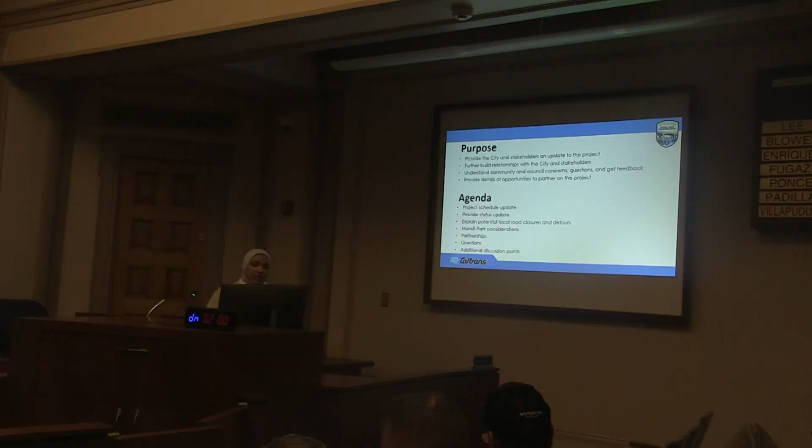So today I'm going to go through the project schedule, give you a status on where the project is at, explain some of the potential road closures. They're going to be not just on the highway itself, but certainly some local impacts as well as detours. Some considerations for Morelli Park, which the city oftentimes leases from the state. And look at opportunities for partnerships, and in the end see if there's any questions the community may have.

So again, I will be presenting. I'm the project manager. With me is Jared Craigmore, who's the project engineer, as well as Greg Hewitt, who's the pre-construction manager. We do have a contractor that is assisting us through the design process. They have not been awarded the construction contract yet.

All right, a little bit about the project purpose and need. This bridge, or this set of bridges, was built back in the 1970s, and it spans the Stockton Channel. We're hoping that the replacement of these bridges will ensure long-term serviceability and upgrade the bridges to accommodate permitted loading. Right now it accommodates a certain level of permitted loads. We're hoping when we bring it up and improve the standards, it can carry higher permitted loads.

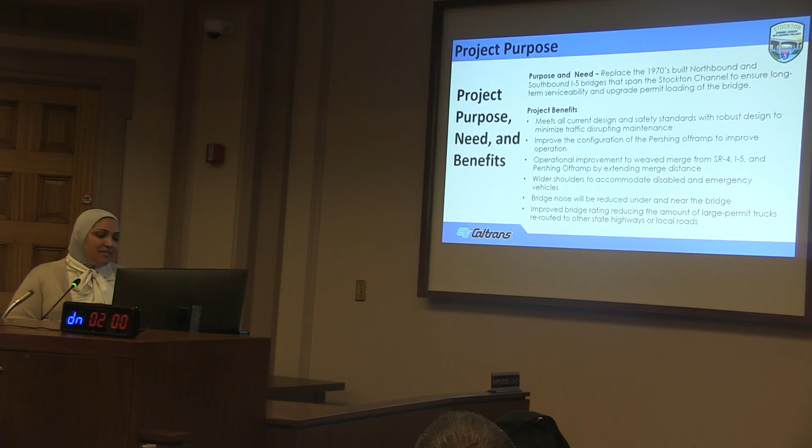The project benefits include meeting all current design standards. It was built to 1970s standards, so that's one of the things we'd like to update, along with current safety standards, while hoping to minimize traffic disruptions and maintenance. We're also hoping to improve the configuration of the Pershing ramp to improve its operation, and improve the operational weaving that happens between State Route 4 and I-5.

This is going to happen by extending the merge distance along the on and off ramps. We're also going to put in wider shoulders. Right now the shoulders are a little narrow, and oftentimes we have to shut down the lane just to perform inspections, not just maintenance. There's likely going to be a reduction in noise because of the type of bridge we're going to be constructing. Lastly, we're going to improve the bridge rating by reducing the amount of large permitted loads that sometimes have to reroute to other state highways or even local roads.

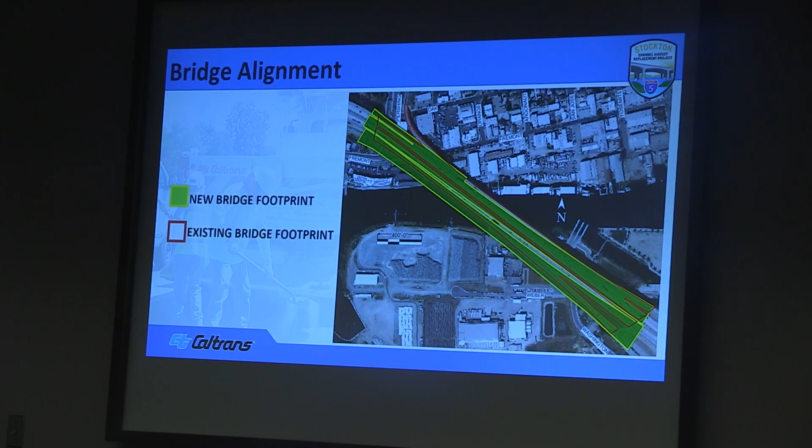So what you see before you is the existing bridge footprint right now. We're going to be shifting the bridge about 50 feet in a south-westerly direction. So the green outline is basically where the bridge is going to be shifting.

The current schedule of the project: we are in the pre-construction portion, meaning we're in design, and we're in the acquisition of environmental permits process right now, as well as securing some of the right-of-way needed for this project. We're going to be working on the design for the next year and a half, and the northbound will be complete probably in the second half of 2028.

We also did get the biological opinion for this project already, and we are going to be looking to get our CEQA and NEPA addendum completed by next month. The environmental permits process applications are starting, and hopefully we are going to be receiving all of them by next fall. The right-of-way acquisition has actually already started several months ago.

The construction schedule - we're going to start with a pre-construction task: a geotechnical investigation we have to perform. It's a test pile program, and we're going to try to see if we can reduce the length of some of these test piles. I'll talk more about that. Then after that, we're going to start with the Buena Vista overpass.

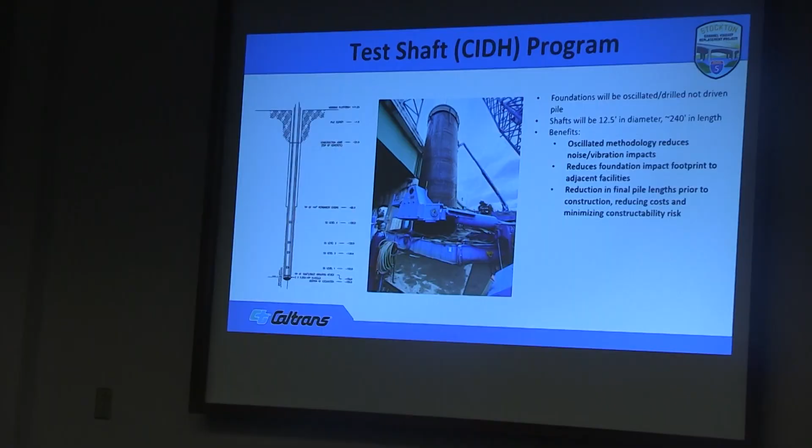This is the test shaft program we talked about. This is really something we have to do to help optimize our design. The piles right now, the shafts, are about 240 feet long per the current design. We're hoping to make them a little bit shorter and hopefully save some money.

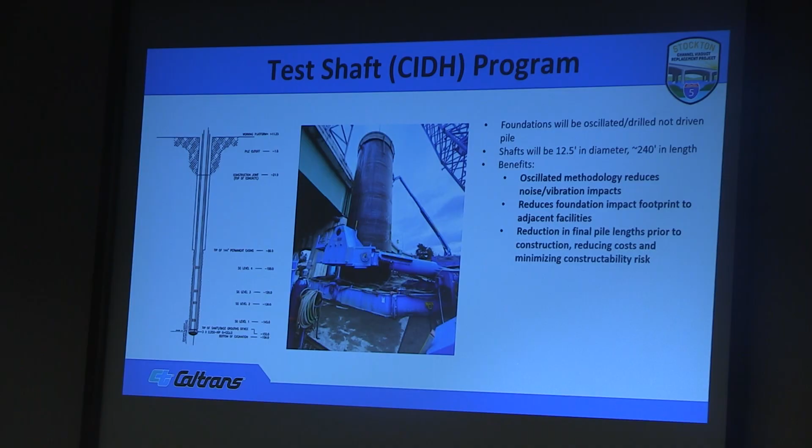So we're going to be doing some tests in a couple of locations. This is going to utilize an oscillation method - a very big hole, about 12.5 feet in diameter. We're going to oscillate this, so it's not going to be pounding, if you will, but very much an oscillation method of construction.

As noted, when we reduce the length of the piles, we reduce cost and we reduce a lot of risk. If there are any constructability issues, we capture them early before we're actually full on in construction.

There's going to be multiple locations for this. The test pile program is probably about 4 months in duration. We'll probably have about 3 locations for this, and I'm hoping I can point them out to you. So this is one of the locations over here in Morelli Park, and this is another one of the locations over here in Morelli Park. We'll likely be occupying a portion of Morelli Park while performing this particular test.

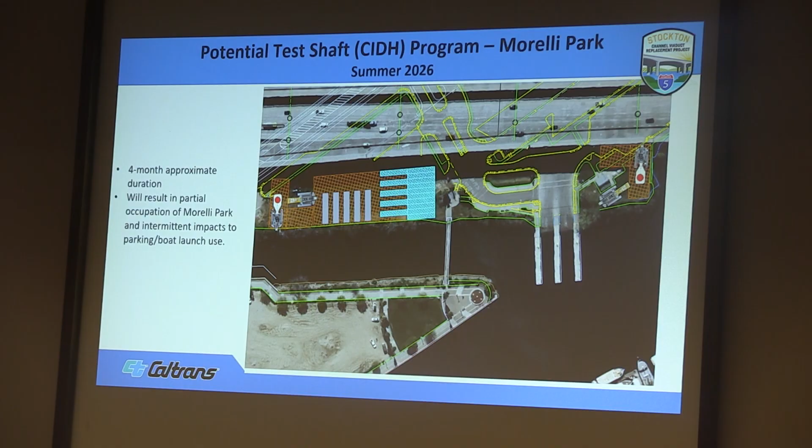Likely, we're targeting the summer of 2026 to be performing this. So some of the parking might be limited, and the boat launch might also be limited during that period. The other location is over here.

If you recognize this particular area, this is the Pershing off-ramp right now, and this is the on-ramp over here to I-5. This is sort of the little corner area between this highway and the ramp, where we're looking to perform that other test pile. So there's going to be a total of 3 locations, and all of those will fall within Caltrans right of way.

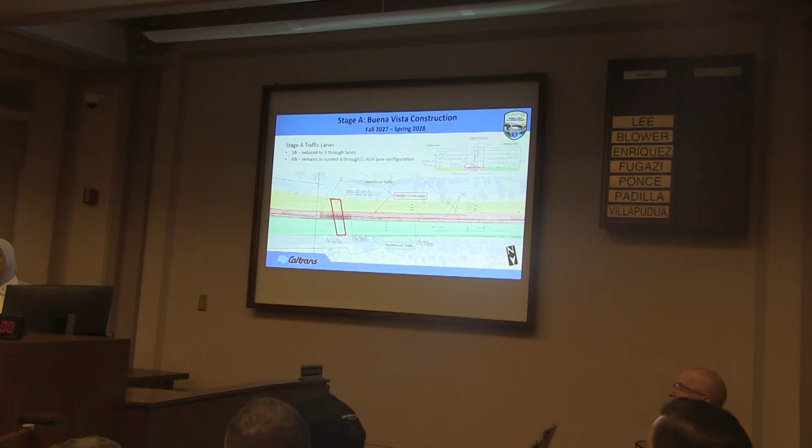Okay, Buena Vista - this is stage A. It's not quite stage 1, but it's stage A, and this is intended to help with the shifting of the lanes.

We're going to be widening this particular section over here, and we're going to have basically 3 through lanes on the southbound bridge, while the northbound remains as is in this particular scenario.

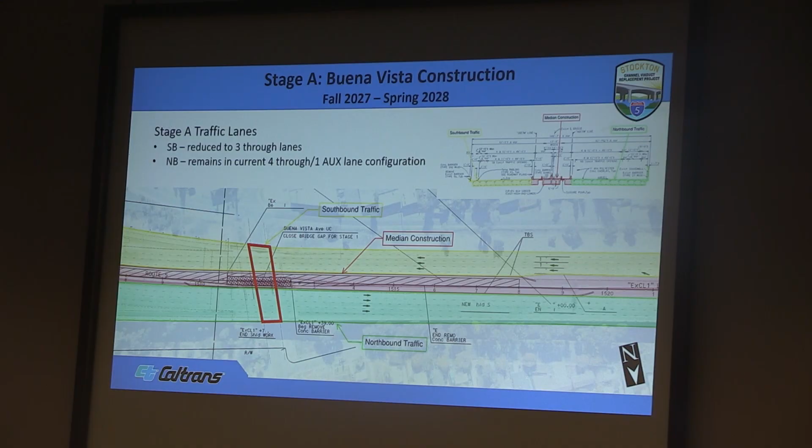This is intended to be late fall of 2027 into spring of 2028. So this is not intended to be a long segment.

After that, we're going to move to stage 1. This is the outer side of the southbound bridge, where we'll be demolishing the outside portion of the bridge, and there will only be 3 through lanes on the bridge. The northbound bridge will not be impacted.

And you'll see over here, this is the new bridge construction - I'm just going to call it the tan color. The tan color is where the new bridge construction is going to be. Stage 2: we shift the traffic onto the newly constructed portion, what was tan now gets to be yellow.

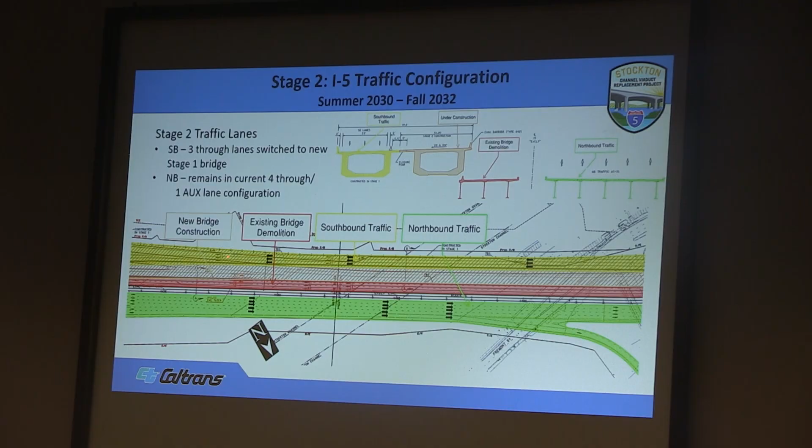So the southbound traffic will be on this portion. Then we will come in and demolish the inside portion of the bridge, the red portion over here, and construct the tan color. So this is stage 2 for the southbound bridge. Again, northbound will not be impacted - it will continue as is.

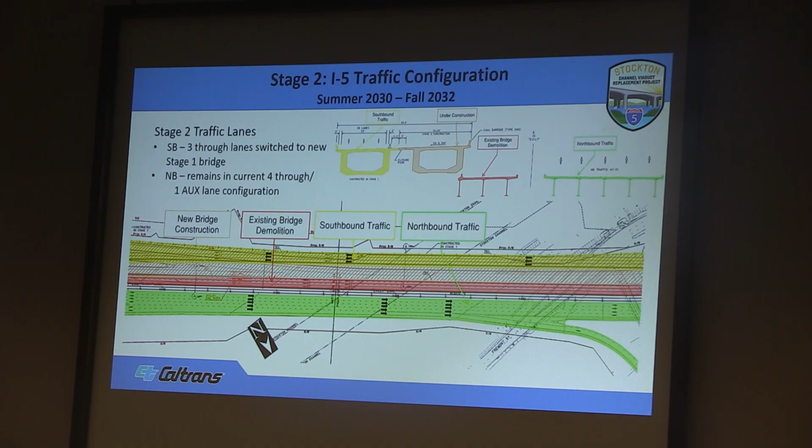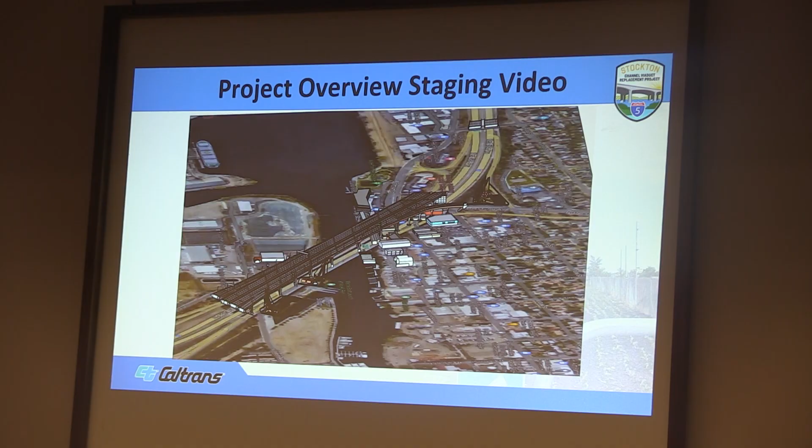This is a short video to describe what I just said. We're hoping visually it might help everybody understand how this is going to work. I hope this is going to start with the test pile program first and show you the locations of those.

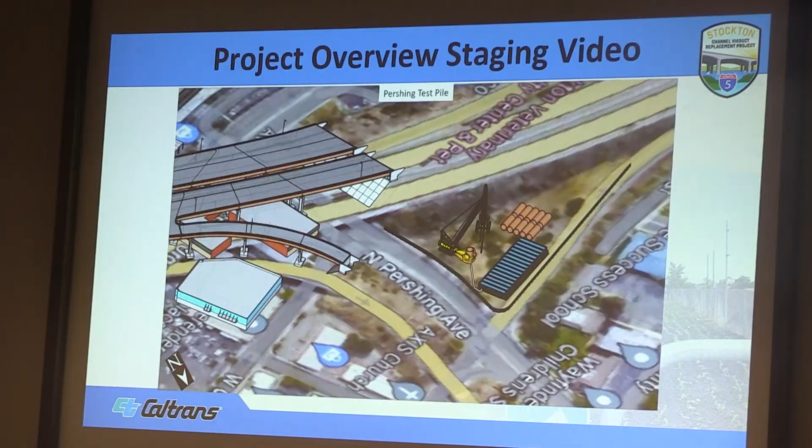All right, so those are the areas in Morelli Park over here, and you see where the boat launches are. And then over here, this is the area off of Pershing and near the on-ramp.

All right, this is the Buena Vista segment over here that we're going to call it stage A, if you will. This is the widening of Buena Vista.

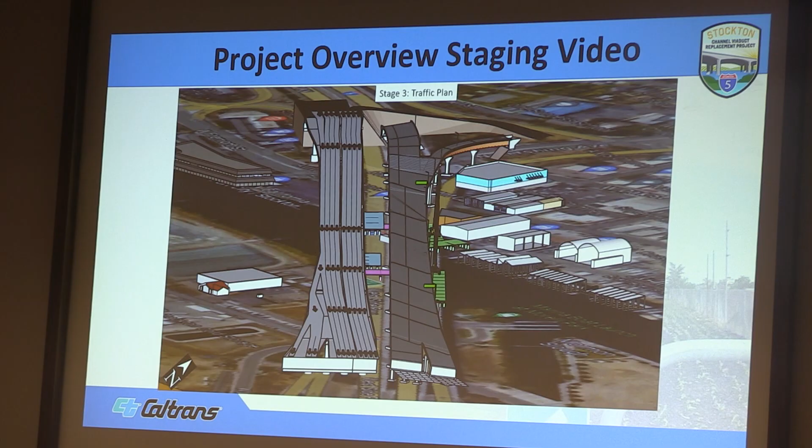And then over onto the southbound bridge, you will see stage 1. We take out, we demolish the southbound half bridge and reconstruct it. Stage 2, we move the traffic onto it and take out the inside portion of the bridge and reconstruct that. And then switch the traffic both onto the same bridge and reconstruct the northbound bridge.

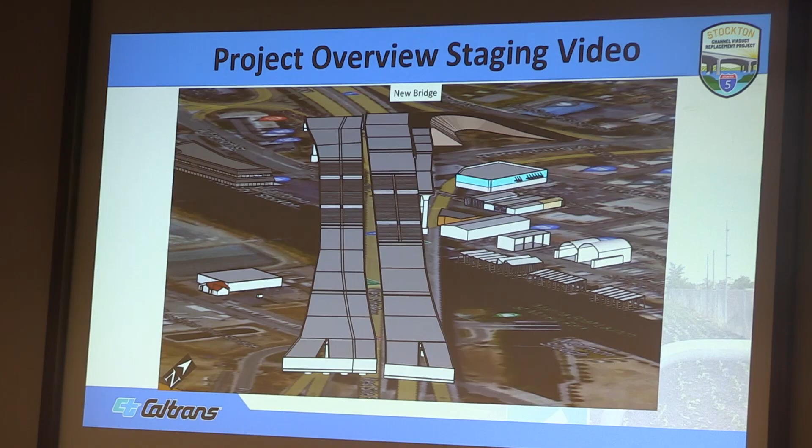And what you will see at the very end there is a hook ramp showing what the Pershing reconfiguration will look like at the end.

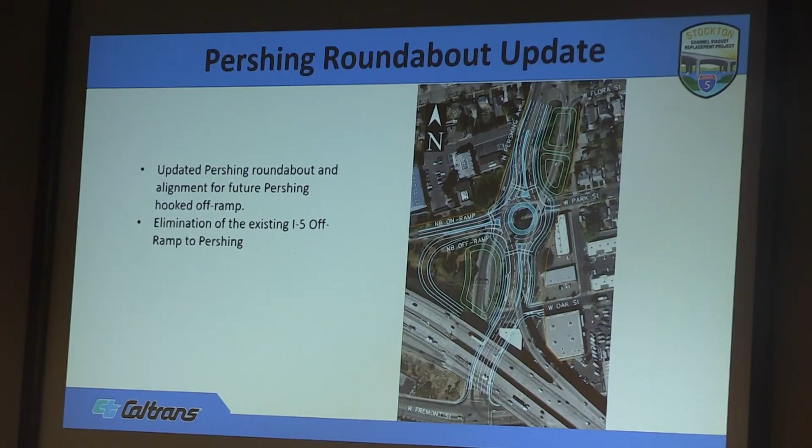One more item: the termini of the Pershing off-ramp, after some study, we concluded that a roundabout is the best way to actually treat that termini. It's the best thing in terms of safety and in terms of operation of that particular area. It slows people down significantly, and so that local operation continues.

Do you mind taking a question right now? I'm sure. Sorry, quick question. So in terms of timeline, this Pershing roundabout, where are we with that in terms of years?

So this is the very last piece that is going to be constructed. We have to start with shifting the southbound bridge first out of the way, and then constructing the northbound bridge. When we shift the northbound bridge, we'll create enough space for the hook ramp that will come off of Pershing, and the termini will be the roundabout. It is the very last piece of the project.

And I asked that question because I guess I asked this earlier to the chair: why wouldn't north and south be inverted? I mean, I would think that the northbound is more of a priority. Why can't we? For the record, why not?

We have to create the space in order to create the hook ramp, in order to add the roundabout. Right now, this space does not exist. It is really, really tight between the on-ramp, so we have to shift it a little bit, put the hook ramp in, and put the roundabout. But we have to shift both bridges first. That is the staging that we actually determined. There is no way to start with the northbound bridge, unfortunately.

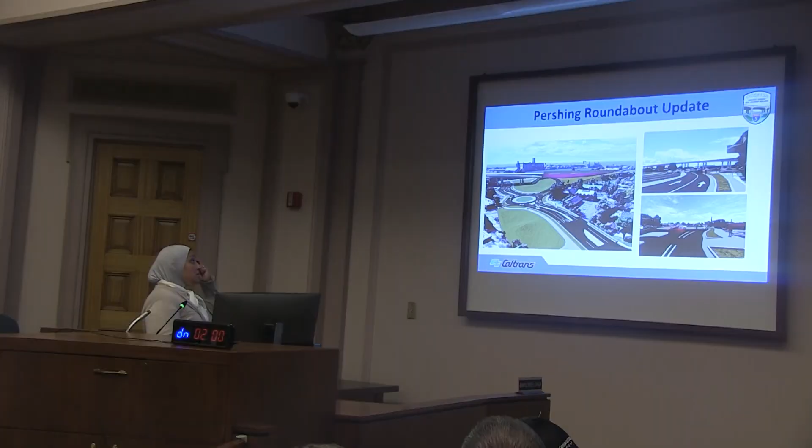Okay, so a little bit more about what the Pershing roundabout sort of things look like. This is a little bit of a simulation, if you will. It's not exact, but it's the best that we can do at the time. Basically showing the traffic moving east and west through the roundabout, and certainly being able to traverse.

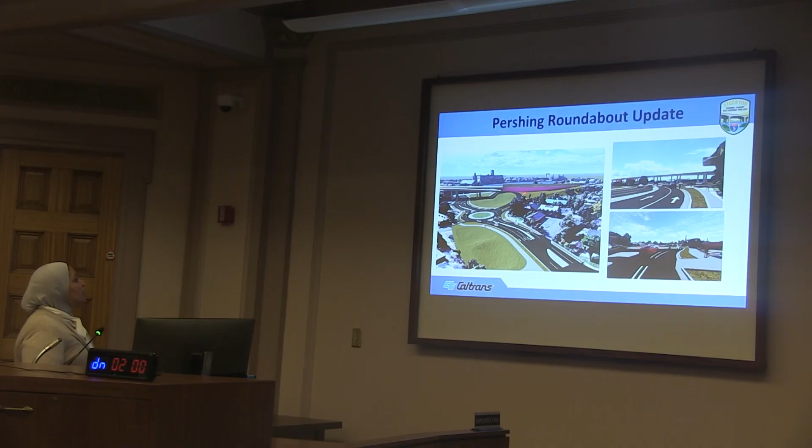So, I don't know if it helps. Over here, you can sort of see the northbound and the planned southbound hook are really close to each other. We're going to be eliminating the current off-ramp that exists right now. That's one of the things we're planning on doing. But we have to create, by shifting the northbound bridge a little bit more southwest, more space here so that the ramp and the super elevation of the ramp is appropriate. Otherwise it becomes way too steep, and cars end up with a little bit more centrifugal force coming in. So we're trying to create a smooth transition.

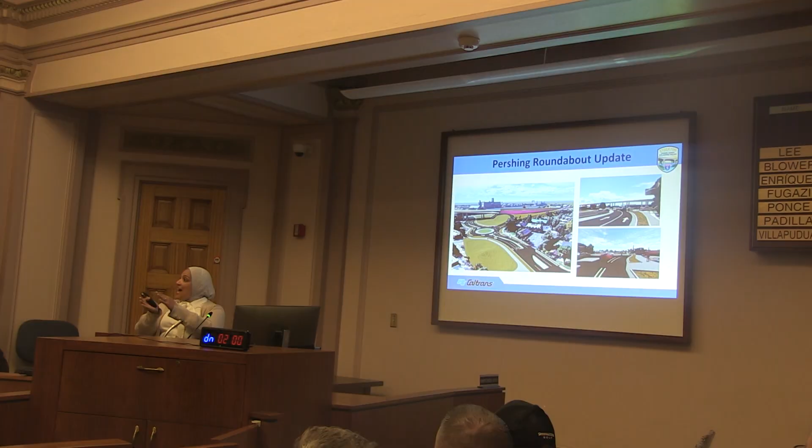And all this isn't going to be done until, what, fall of '35? Yeah, it will be the last portion of the project. Any chance we can do it a little quicker? You know, we are constantly looking at our schedule and trying to find efficiencies in it. Whenever we're able to put two tasks together instead of making them in series, making some of them parallel so we can create efficiency in the schedule, we are. So we're looking at some efficiencies already.

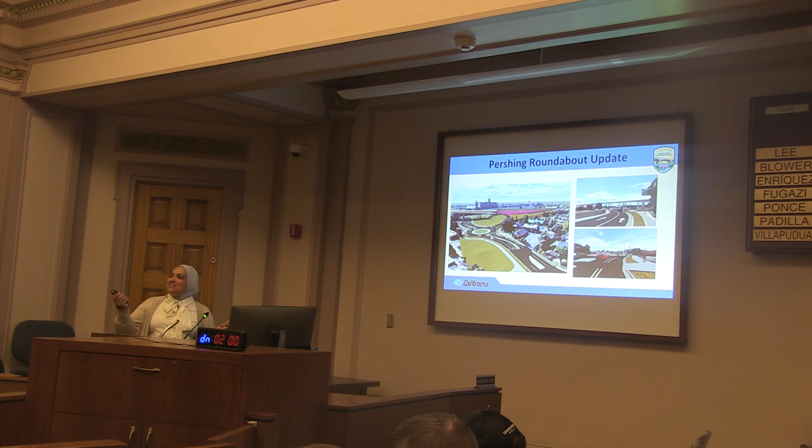Okay, I'm going to hand it over to Greg to talk a little bit about local road improvements. Very much.

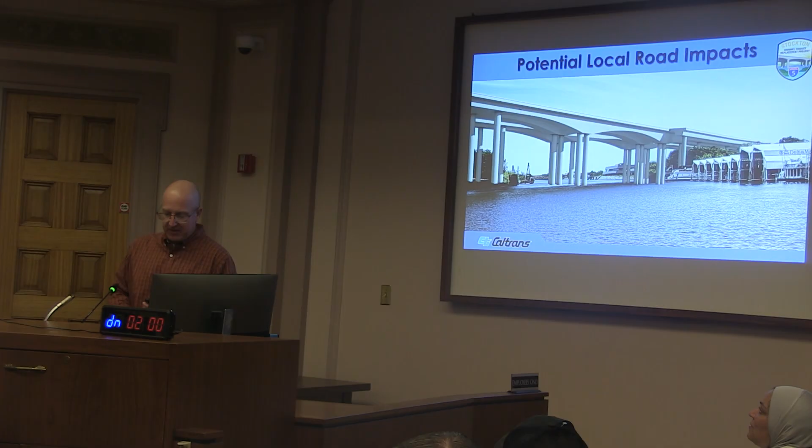Hey, good afternoon, gentlemen, thanks for having us. My name is Greg Nix. I'm with Kiewit Construction. We are the pre-construction contractor working with Caltrans right now through the process. I'm going to talk to you a little bit about what it will look like as we're doing construction. You'll have to envision some things because obviously we're not building anything right now. Dina talked about various strategic staging of the work we're going to be doing, and Jerry's going to talk to you about some of the impacts of our work on the local community. So I'm going to try to explain how the work happens.

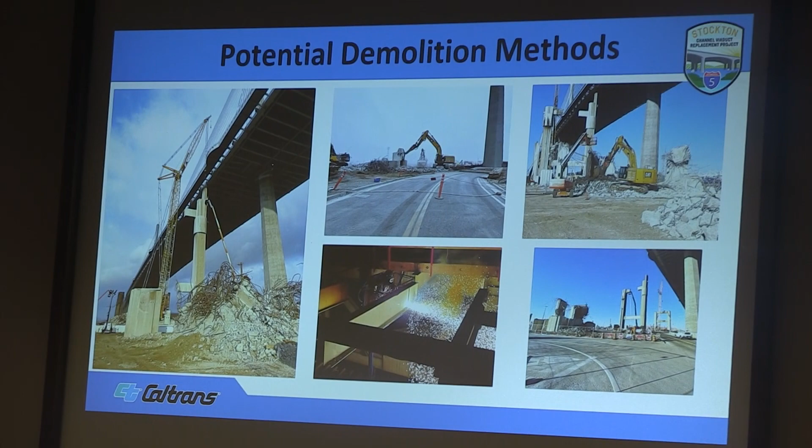The first thing we have to do with every stage is demolish the existing bridge, and this is what it looks like. Here's some pictures of demolition from other projects we've done. It's messy, it's all overhead work, everything's happening up above you. So it's not safe, it doesn't make sense for traffic to be moving underneath. There's always going to be some sort of impact when we're doing demolition of overhead work, and so at those points in time we're going to take traffic and detour away from the work.

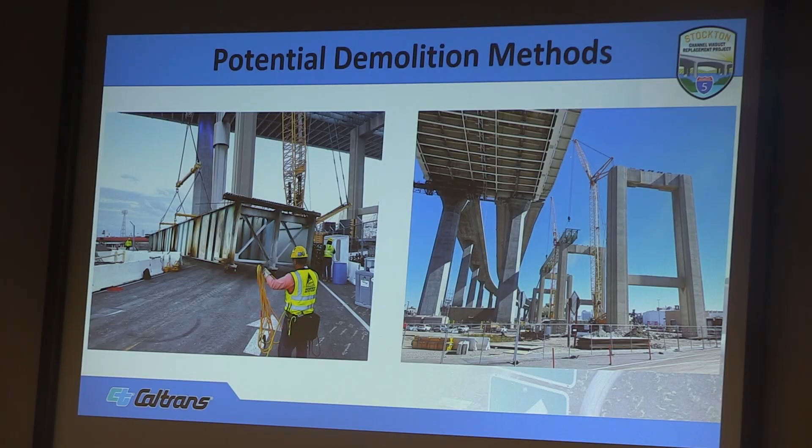The first part, those first pictures, was some concrete demolition. This is structural steel demolition. The way we'd approach the work is we're going to pick these pieces of the bridge down in the biggest pieces possible, set them down to the ground, cut them up into smaller pieces, and get rid of it. So what do you do with these big pieces? You pick them off the bridge and set them down on the ground, which sometimes is going to be right on the road we're working on. That's why we're going to impact some of this work.

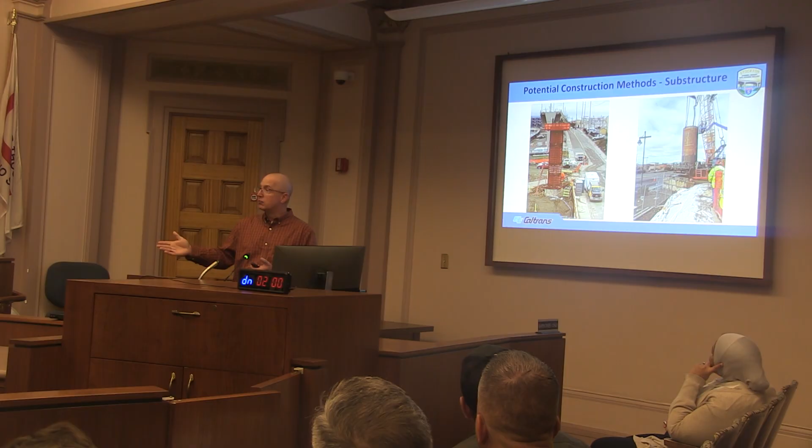After you demolish the bridge, the next thing you do is start construction of the new bridge. The first part of construction is the foundations. Dina talked to you about the foundations on these jobs being 12.5-foot diameter, 240-foot deep drill shafts. Everything is big, the equipment is big that goes along with it, and it takes up a lot of space. Some of the foundations are right near existing roads, some are at medians of the roads, so we need space to do that work. Again, when some of this work is going on, we'll have to detour traffic around it to keep traffic and pedestrians safe and away from our work.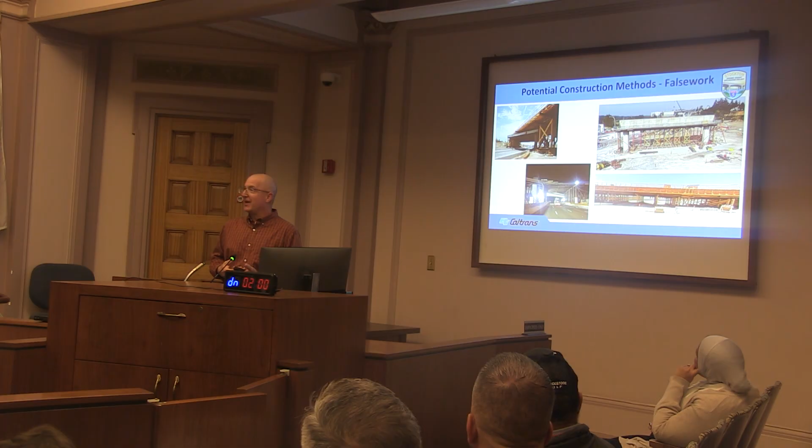Once we build the foundations and the substructure, now everything up above you has to be built. The entire bridge is all constructed of cast-in-place concrete, meaning we bring concrete in on trucks, pump it into place, it has to cure, we stress it with post-tensioning, and then it's done. But we have to support that concrete somehow, so we support it with false work. False work, again, takes up a lot of space. These are some pictures of several other jobs where we've built false work to support the concrete up above us.

In some cases, like the picture in the top left, we can build a tunnel for local roads to go through underneath our work. And in some cases it just doesn't work or doesn't make sense, so we'll build falsework across the roads and detour traffic around it temporarily.

Dina talked about the staging. The job will be built in 3 stages, meaning we're going to demo and build a bridge, demo and build a bridge, and demo and build a bridge. So the process happens 3 times, and there's always going to be some sort of impact.

Jerry's going to talk to you about sometimes when we have prolonged closures and sometimes when we have intermittent closures with detours. But that's why the process is going to be that way - it's not just going to be, hey, we're going to come in and hit the demo real hard and then go away. We're going to hit the demo hard and we've got to build a bridge, then we've got to do it again 2 more times.

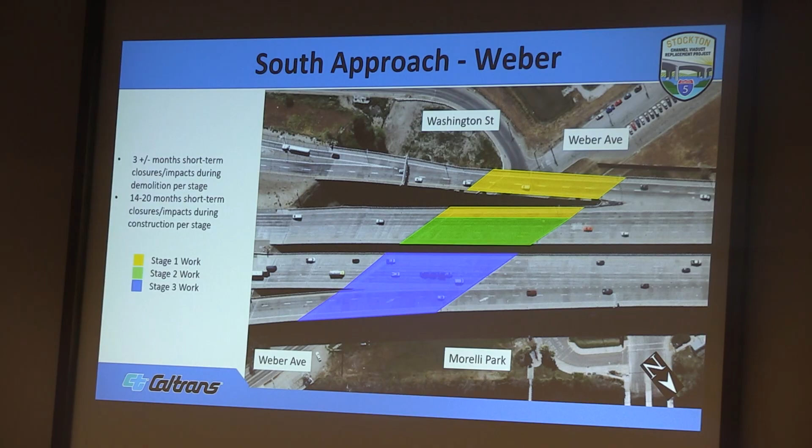This is Weber. Same thing on Pershing and Fremont. When we're on Pershing and Fremont, you've got 2 roads right there being impacted similarly. We're going to try our hardest, and we've got some detour plans where we don't impact both Fremont and Pershing at the same time. Hopefully we'll be able to work it out where we impact one and detour traffic around, then impact the other, and vice versa.

Jerry, I think the next few slides are yours. Jerry's going to talk about, now that you understand exactly what we're going to be doing and how we stage the traffic, what happens with the traffic. So I'll turn it over to Jerry.

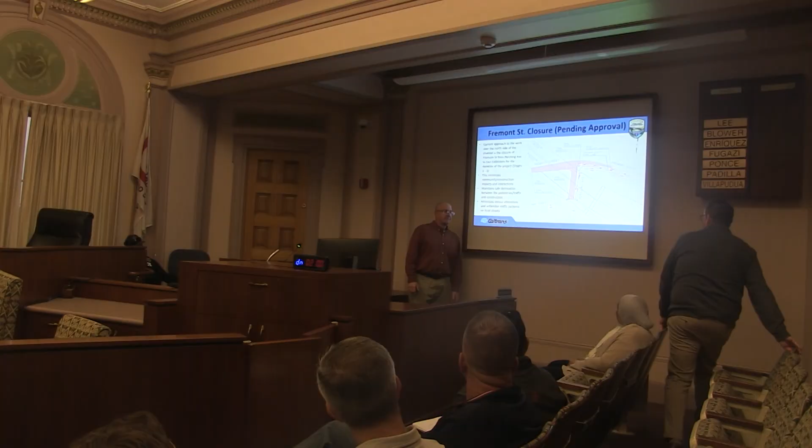Hello everybody, my name is Jerry Brigmore and I am the project engineer for the roadway portion of this project. It's predominantly a structure project, so the structures design team is going to do most of the work, but the roadway part is what the team I work with is working on. So let me make sure I know how to work this thing.

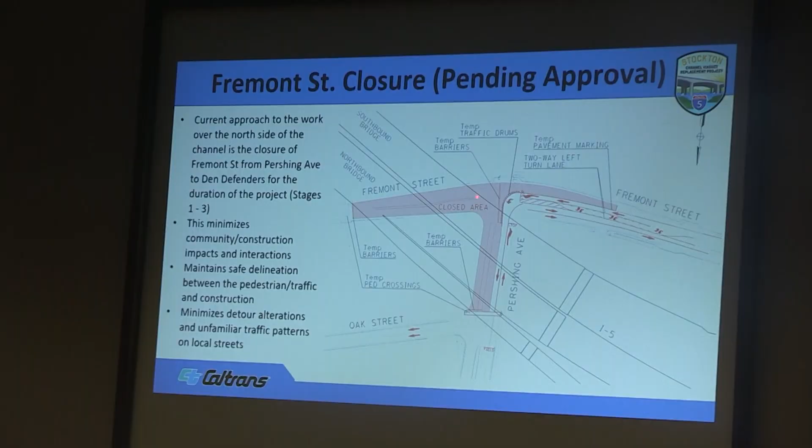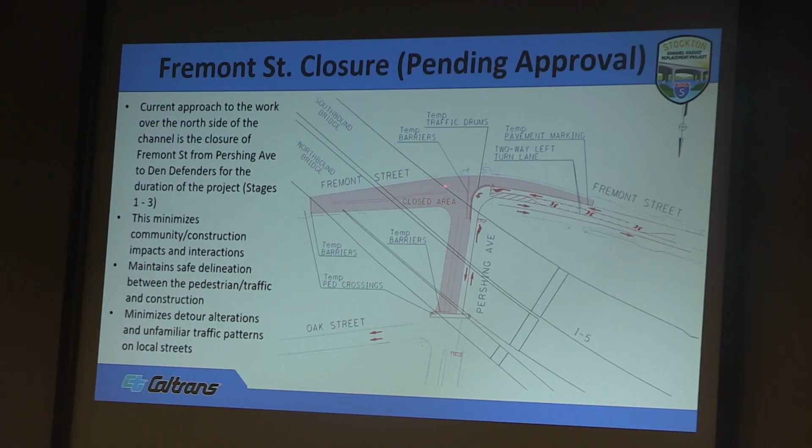Greg talked about and showed pictures of falsework. There's basically a forest of falsework piers and structure that's going to be on Fremont Street, Pershing also. There's going to be constant construction vehicles and equipment going back and forth across Fremont Street.

While it would be possible to snake traffic through there when we aren't doing something really dangerous overhead, there will be some times when there's not really dangerous things going on overhead. But even then, to be able to allow traffic through there would really add a lot to the project schedule.

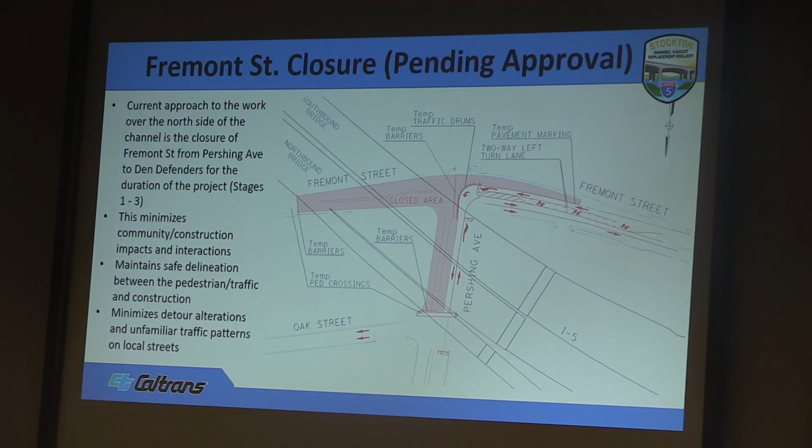So for Fremont Street, the design team really felt like it made the most sense - instead of having Fremont Street open to one lane of traffic and then closed for a while, then open for a while, then closed for a while, with people trying to figure out when is it open, when is it closed - it just made more sense all the way around to have it closed for the duration of the project and get around it on Orange Street, Oak Street, and Park Street to Pershing Avenue.

You can see we'd have the east half of Pershing Avenue closed, and then the west half - north, if you see in the upper right corner, north is pointing down on this map, and that has to do with the way Caltrans orients its plans. It's confusing, but the west side of Pershing Avenue on the right would be open most of the time, but also would have to be intermittently closed because we're also doing some of that dangerous work over Pershing Avenue.

But we have planned to not only keep it open, but also to guarantee access to and from the Golden Bear property on the south, the Arco AMPM, and I believe the veterinary clinic on the north side.

That was kind of an important thing for us, but also to protect the workers that are going to be working in those areas. So, okay, I think next slide.

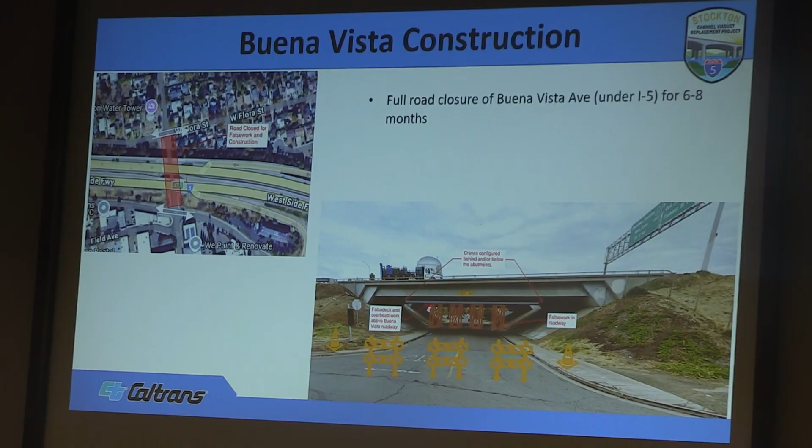Greg already mentioned the Buena Vista work, which is so we can close the gap between those two bridges so that traffic shifting can happen when we shift traffic, it needs to go where there's a gap right now. So first order of work is to close that. This is about what it'll look like - there will be false work where Buena Vista passes under the freeway, so that will be closed off for the duration of that work, about 8 months is what we're estimating right now. But there are nearby roads that we can detour on, and we'll show those in a couple of slides.

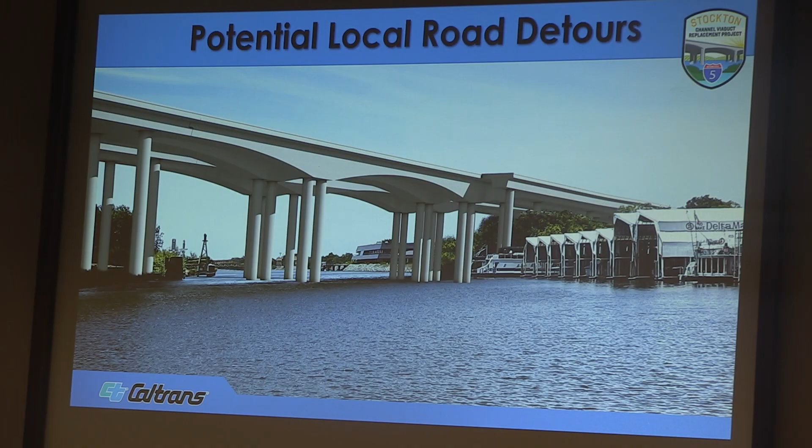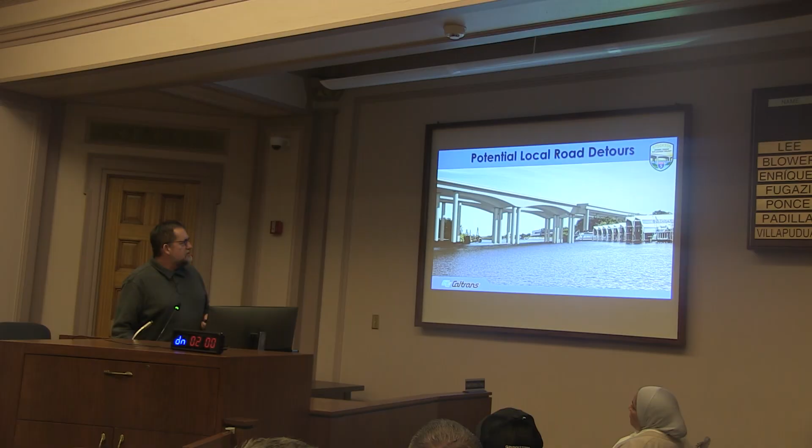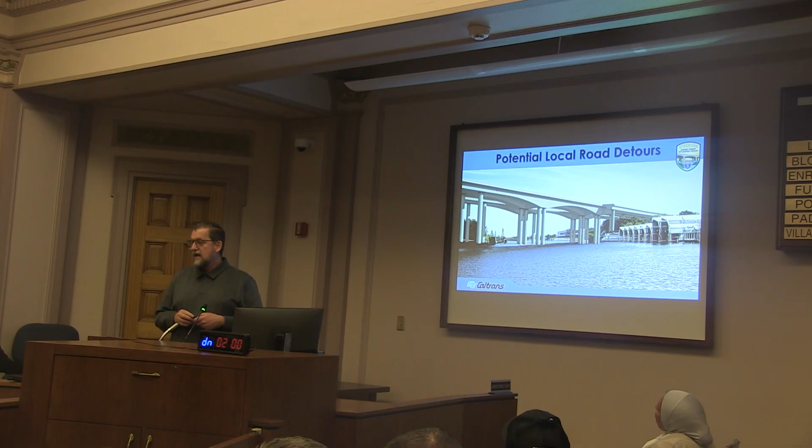So here we'll talk about the local road detours. Obviously there's no way to avoid all impacts to the local roads and local users, but we do try our best to minimize those impacts. Our public information office informs the public of when these closures are going to happen, and while we're designing them, we've had pretty extensive communication with the city traffic engineering division. So except where I mentioned otherwise, the traffic engineer and his staff have reviewed these, have reviewed the traffic numbers for modeling the impacts, and they concur with what we're proposing here.

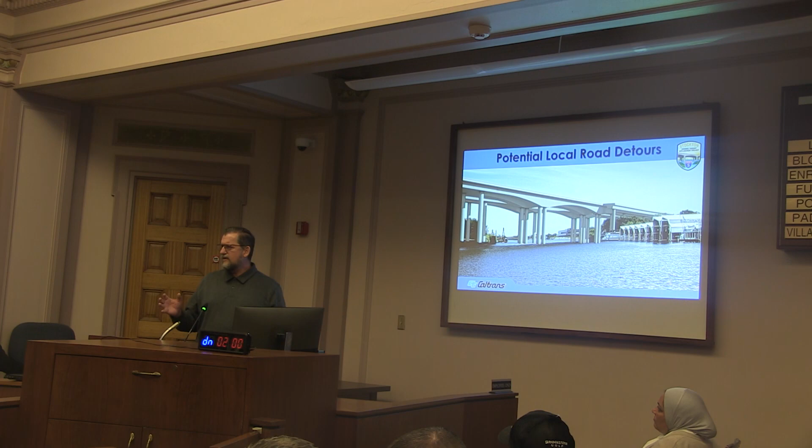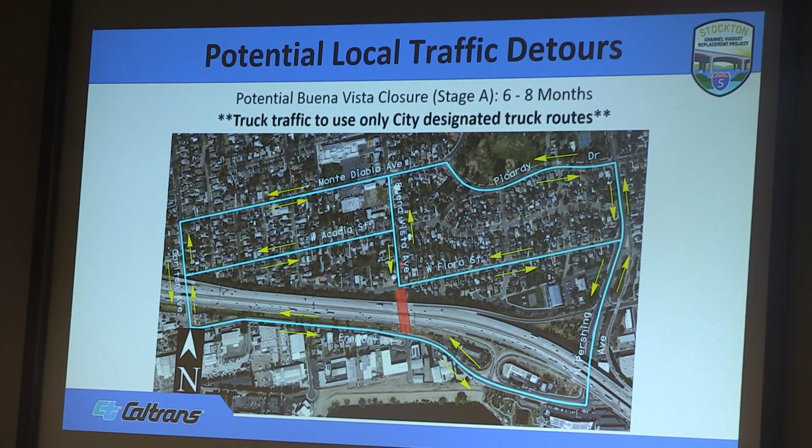So here is the Buena Vista closure that we've been talking about, and as you can see, while that's happening, either on Fremont Street, Acacia Flora, Monte Diablo, traffic can detour either to Carlton Avenue or Pershing Avenue to cross under I-5. Again, we're looking at 6 to 8 months for this stage.

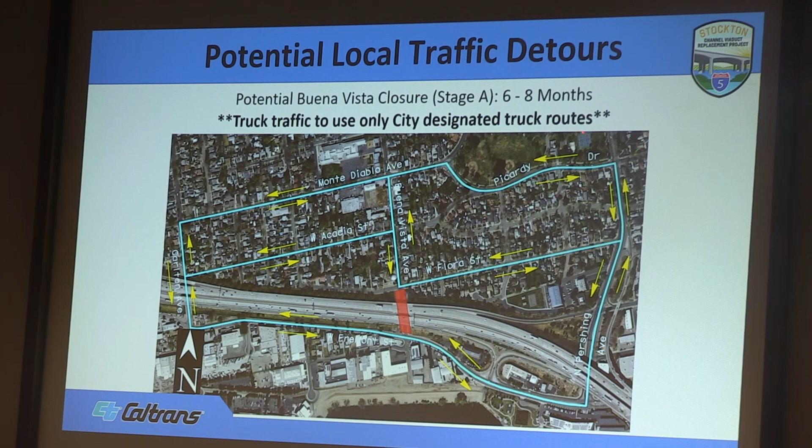Yeah, I do want to mention too, and we're going to talk about this some more in a little bit - we're going to talk more about the truck traffic, but we do want to mention through all of these that we are not going to be routing big trucks on the city streets, and they're not going to be allowed to go on any streets that they're not already permitted to go. But we'll hit that a little bit later.

So stage 1, one of the early things that will happen - north is up now - the connector from southbound I-5 to westbound State Route 4 will have to be closed for stage 1, and so traffic wanting to go either to the Bay Area via State Route 4 or to the Port of Stockton West Complex will instead go down to Charterway and either stay on Charter to the Bay Area or go north on Tillie Lewis Drive to get over to the Port of Stockton West Complex. That's something that we worked out with City Traffic Department too - we're going to keep them off of Navy Drive. It's busy and kind of congested, but Charterway will be the detour.

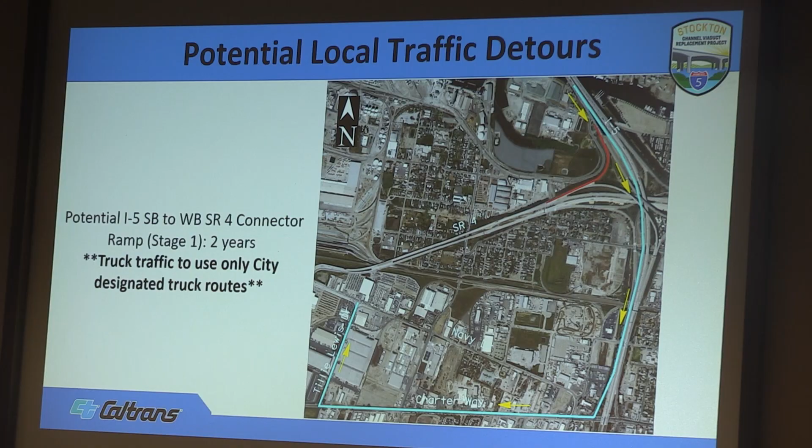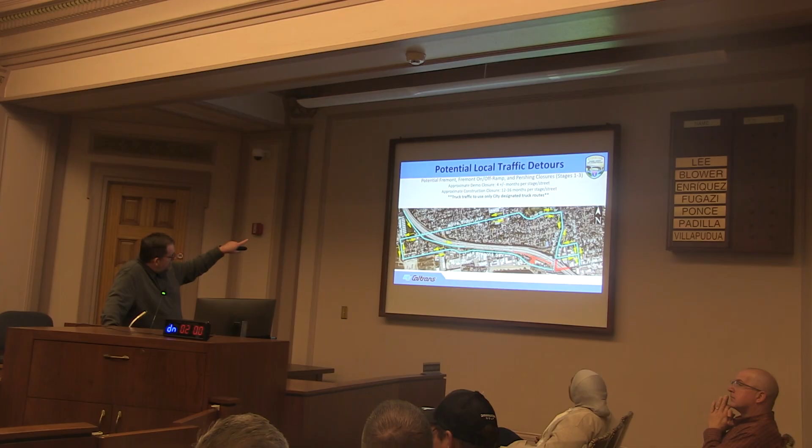For stage 1, the off-ramp from southbound I-5 to Fremont Street will be closed, and the on-ramp to southbound I-5 from Fremont Street will be closed during stages 1 and 2. You can see over on Fremont Street where we have that closure of Fremont and where we have the closure of the east side of Pershing. That dashed area, red and blue, part of the time that will be closed, and the rest of the time it'll be open and be part of the detour for Fremont Street traffic. When the off-ramp to Fremont is closed, traffic will be detoured to the off-ramp to Monte Diablo Avenue. When the on-ramp is closed, the detour will be the on-ramp from Monte Diablo Avenue. So the detour isn't too far. By this time, Buena Vista will be open, so even though we don't show it as a detour, it will be open.

Okay, and now we have some northbound ramps.

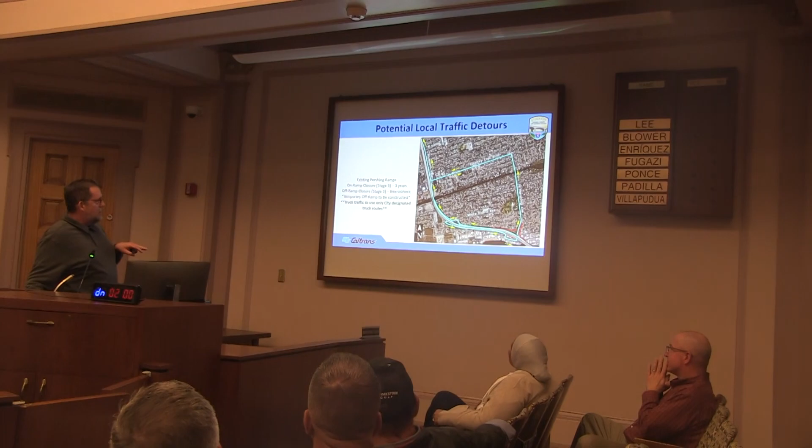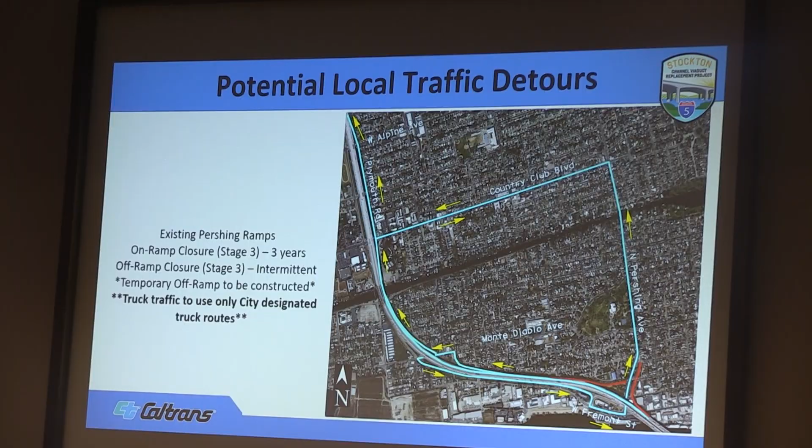The northbound on-ramp from Pershing Avenue to northbound I-5 will be closed during stage 3 because we're replacing the northbound half of the bridge. The off-ramp from northbound I-5 to Pershing Avenue will be taken out and replaced with the loop ramp we talked about before, so we won't be shooting freeway traffic onto Pershing Avenue anymore. We'll be slowing them down with the roundabout instead.

There's also going to be some shelter for the homes on the east side of Pershing, just north of Flora, who right now have traffic going right in front of their houses. After this, they won't have that. They'll have sheltered ways to get onto Pershing without cars right in front of their homes. I'm a little excited about that.

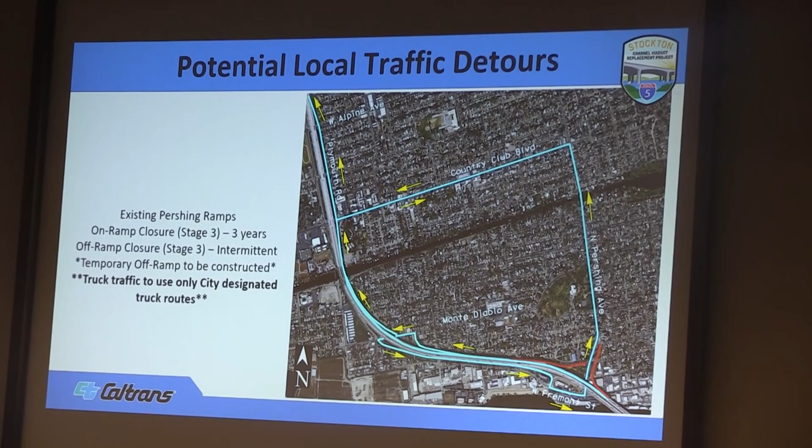So those are both during stage 3. We mentioned the work that's going to be done on Pershing Avenue, and that's all during stage 3 as well. Part of the reason the work on local streets—Weber, Fremont, and Pershing—happens toward the end is that there's going to be so much construction activity crossing those streets that it doesn't make sense to improve them before we have all that heavy equipment on them. So when the bridge construction is done, we'll come back through and repave, and replace curb or sidewalk on those portions of local streets under the bridge.

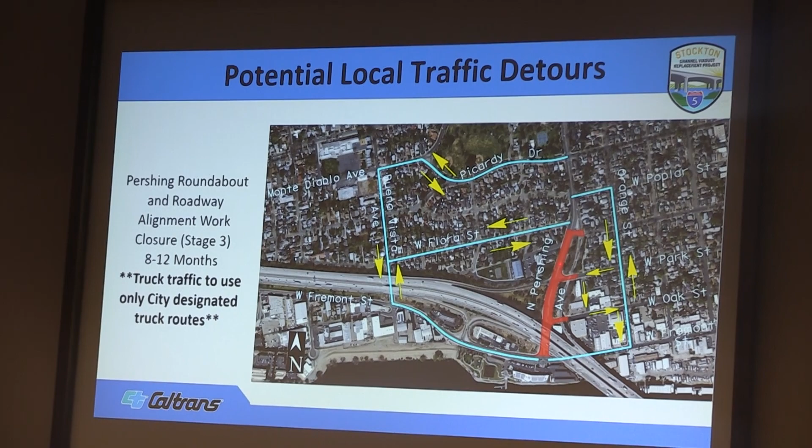On Pershing Avenue, we've got the roundabout we talked about, which is part of stage 3. There's a possibility we could open it to traffic on one side or the other—build the east half, then the west half. We're not quite sure if we'll be able to do that yet, because the roundabout is towards the end of the project and hasn't been the highest priority in terms of design. So its design hasn't progressed as far as some of the other parts of the project.

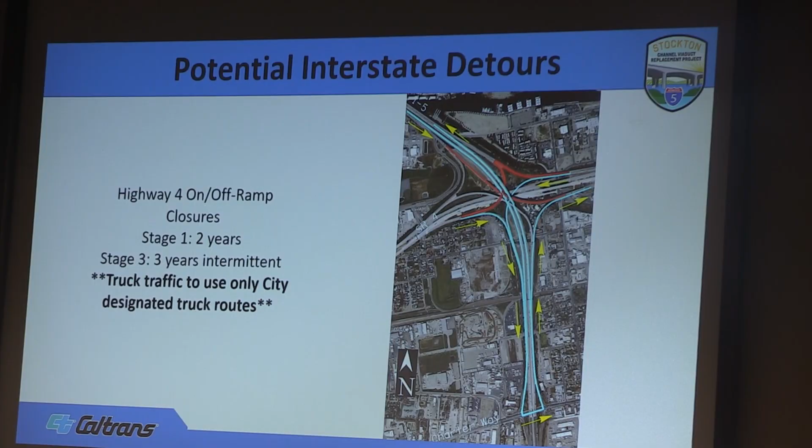Okay, then finally, there are connector ramps that'll have work done. The connector ramp from southbound I-5 to eastbound State Route 4 will be closed during stage 1. The ramp from westbound State Route 4 to I-5 will be closed intermittently part of the time. The ramp from eastbound State Route 4 to northbound I-5 will be closed for all of stage 3. For all of those closures, the detour will basically have southbound traffic go to Charter Way and then get back on northbound at Charter Way.

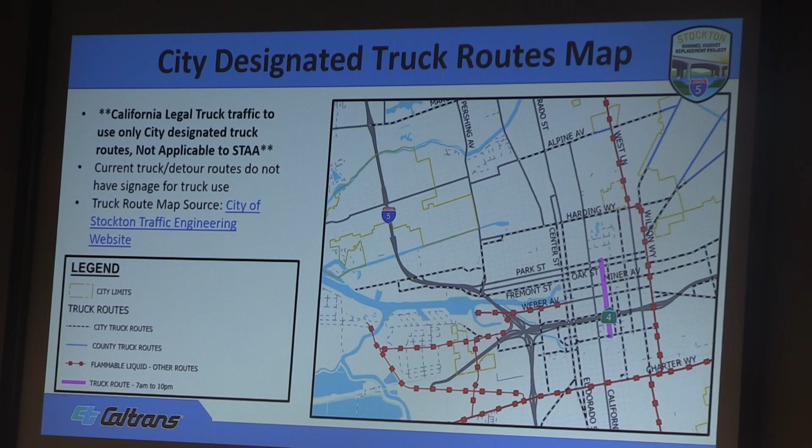What you see here, what's currently allowed, doesn't change during construction. There are a couple of overhead signs spanning the entire freeway that will have to be replaced, and a couple existing ones that will have to be demolished. That can't be done safely while there's traffic on the freeway, so we'll have a short-term, 4 to 8 hour closure for each, during which the southbound freeway will be shut down. During that time, we'll detour traffic starting several miles to the north, giving ample time to exit the freeway up to and including Monte Diablo. But trucks will be forced to exit up at Avenue 12, which is already a designated truck route, and they'll have to take 99 to get through here.

Once again, there's nothing about our project and our traffic control that's going to allow more truck access to local neighborhoods than we have now. Regarding full highway closures—yes, I think there will be two of them, but they'll be nighttime, weekend, at the point of lowest traffic, and we're looking at 4 to 8 hours for each, hoping for.

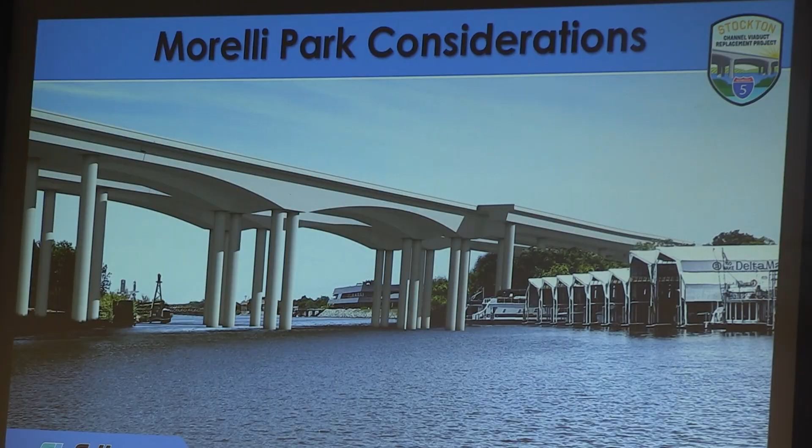And I think Morelli Park is - I can talk about that quick. Just, there's a few other things we just wanted to touch on.

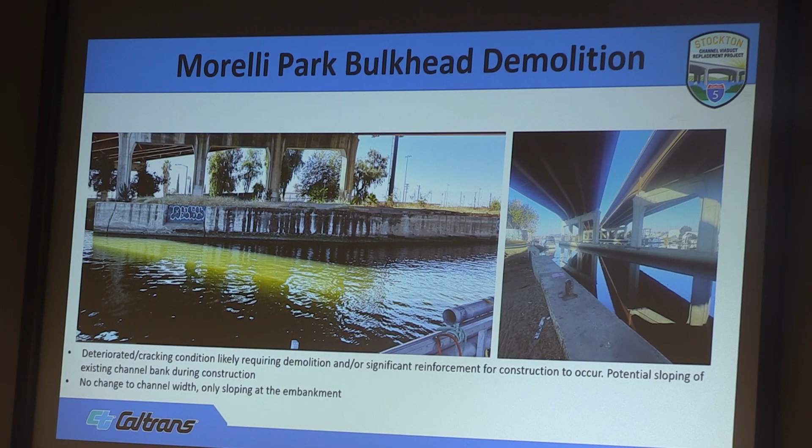One of them is Morelli Park. Morelli is going to be closed for portions of time starting next year, and then once the project starts in earnest, it'll be closed full time. But one of the changes we want to make to Morelli Park is to demolish this existing bulkhead that's there. It's old, deteriorated, and predates the bridge. We're not sure even how it was constructed, so there's some risk there when we go to do construction of what's going to happen to that. And the new bridge, some of the foundations of the new bridge are right there, going through that foundation or going through that bulkhead wall, so that's one thing that we do want to take care of and remove, and then replace with an embankment wall.

The other thing we just wanted to bring up to the council, and don't expect an answer here, but there's this big vacant lot just outside of Mormon Slough, and that would be a fantastic construction staging area for us. We understand that there's some potential development opportunities there that are probably happening, but wanted to just plant the seed that, hey, if some of those development ideas fall through, we'd be willing to occupy that space for you for a few years.

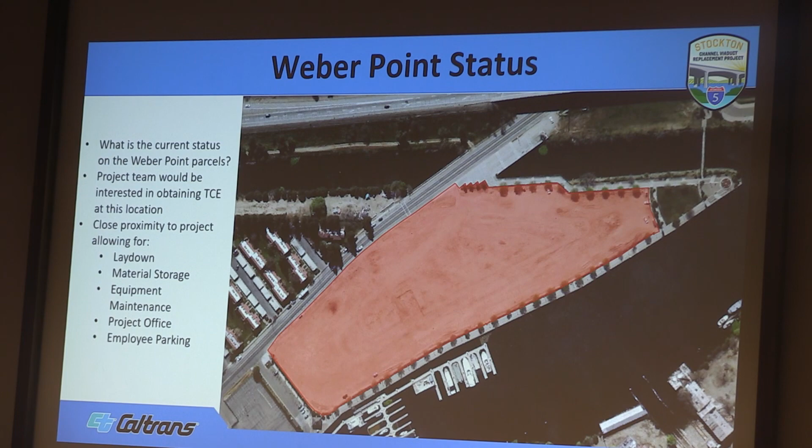And we could use it as a construction staging yard, and we could also use it for employee parking, right? That'd be a perfect place for having our employees park. They could walk across the bridge, across Mormon Slough, get to the job site. Their vehicles can be safe and fenced in and secure.

Okay, I can't make any promises. No doubt. Yeah, just kind of wanted to put it out there on your radar.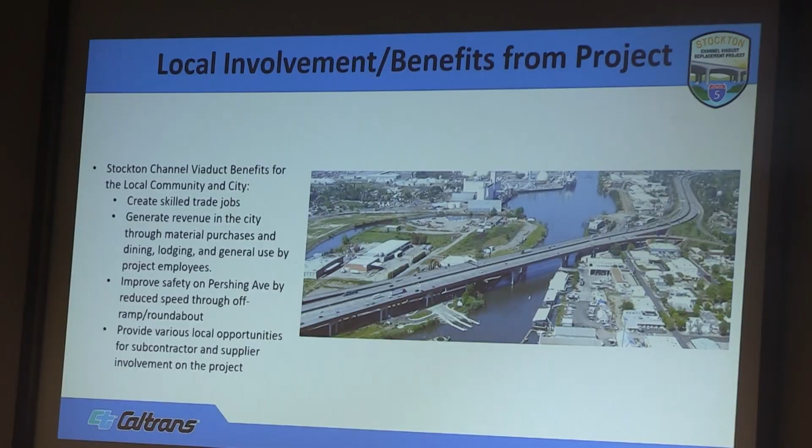Can you put that last picture up with the picture there? That one, yeah. What is that little nub right there at the end? Is that for a future expansion or widening? On the right-hand side, what are you talking about here? The off-ramp. Yeah, there had been thought at one... I'm sorry, if you could go to the microphone, thank you. No worries, no worries.

There had been thought at one point in time of putting sort of a flyover from Highway 4 that would come in and cross over here. We're not constructing it right now, but we did not want to preclude the possibility of being able to have that constructed in the future.

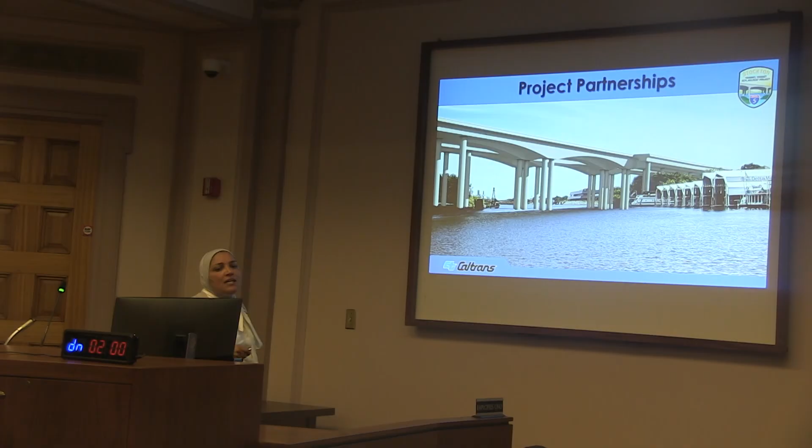So wouldn't the cost of building it right now be about a fifth or a tenth of the cost of building it in the future? I mean, with all these closures, why don't you just build it?

There's a variety of reasons. The project as is currently is really not fully funded, so we're trying to make sure that the bridge itself at least gets funded. This was, if you will, more of a scope creep idea that kind of came into the project - somebody had the idea and said we should do that. It was very much difficult to add because, hey, if you can't fund this, how do you expect to build a full-on flyover? But we didn't want to preclude the possibility of it coming in the future, so if there's ever funding that comes in, that flyover could potentially be constructed later on.

I'm going to move forward over here. So I wanted to talk a little bit about some of the local involvement and benefits from the project. I think one of the things the city will definitely be able to experience as this project moves forward is to create a lot of skilled job opportunities, and I think it will likely generate a significant amount of revenue for the city through material purchases. All these folks coming in are likely going to be lodging, having meals, etc., just from the employees themselves.

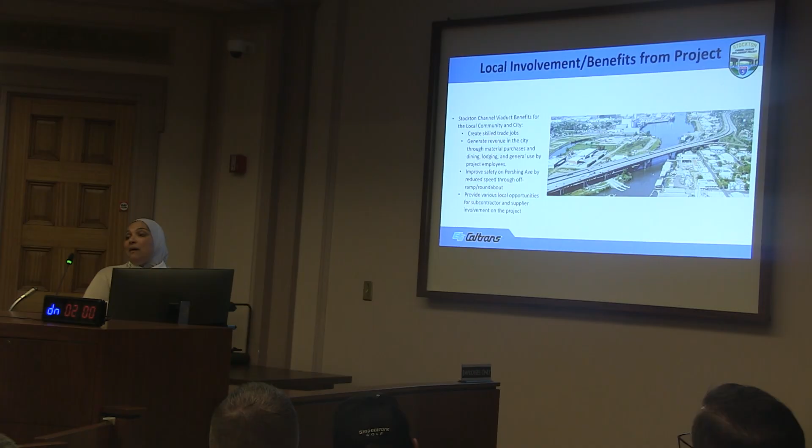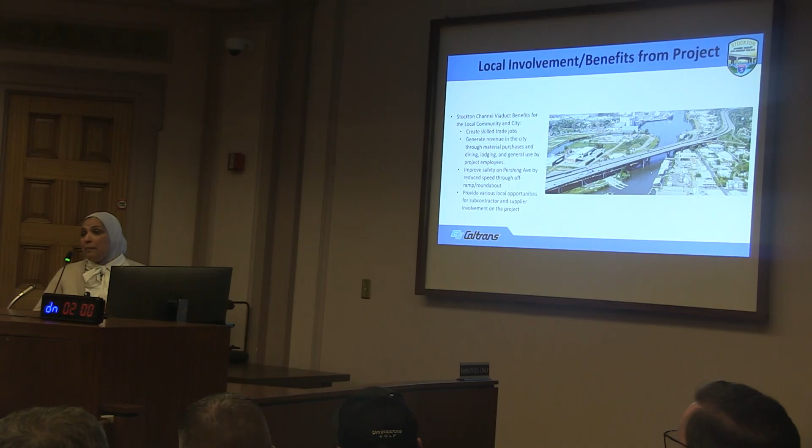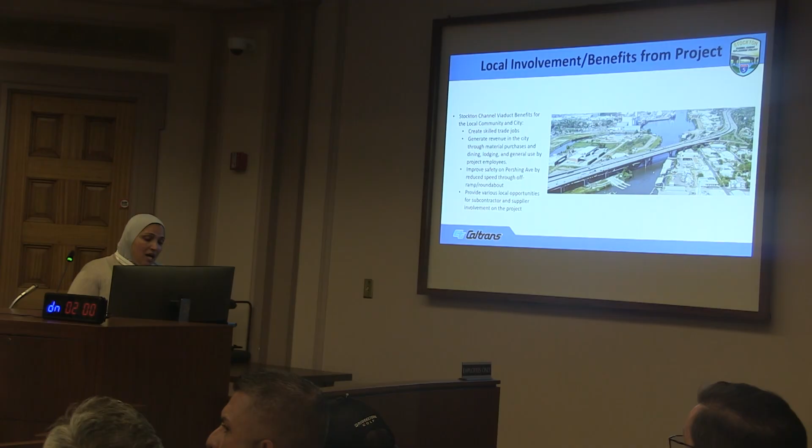We do believe that some of the improvements being proposed, including the Pershing off-ramp, were very much some of the ideas that came up from discussion with city staff. They were fantastic in coordinating with us and helping us move the project forward. They were not part of the project originally, but I think those are going to certainly improve project safety as we reconstruct the off-ramp and the roundabout.

We think there's probably going to be some opportunities for some subcontractors and suppliers to provide services and materials for the project. So I think this is going to be an overall significant economic improvement for the city.

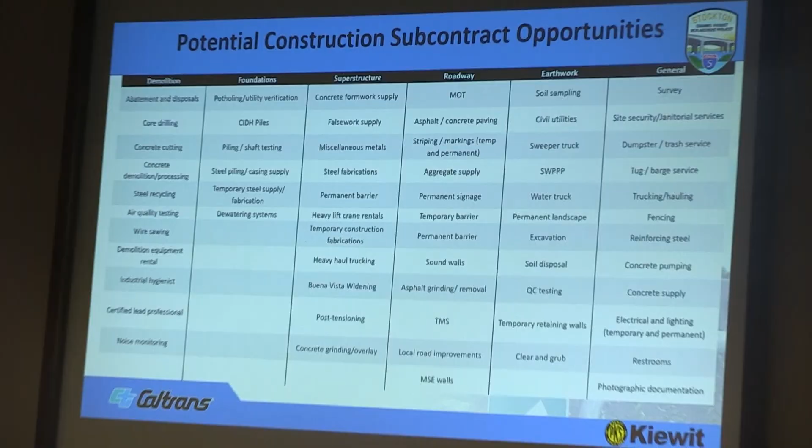There's a whole lot of construction subcontract opportunities that are also going to be available. This is a small list of them in various areas, including demolition, sometimes just being able to truck stuff back and forth on the project. Some truckers are going to be able to get some improvement, and fencing, etc. Whatever it is you can imagine, I definitely see some significant opportunities for subcontractors to come in and benefit. Some of them, I'm sure, whoever we give the construction contract to will definitely be looking for local contractors and suppliers.

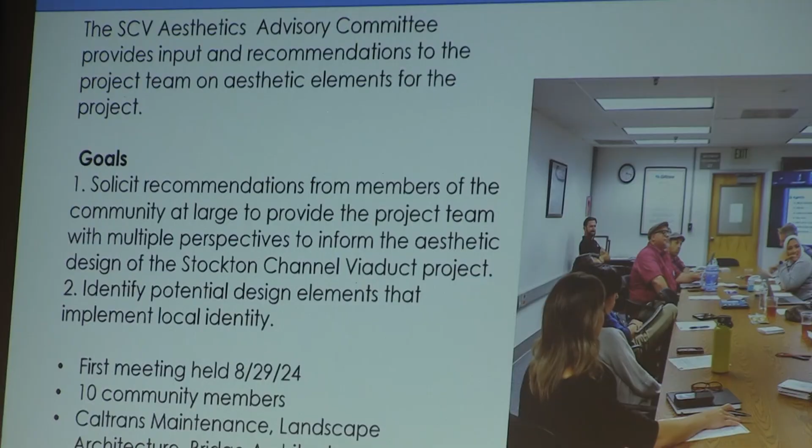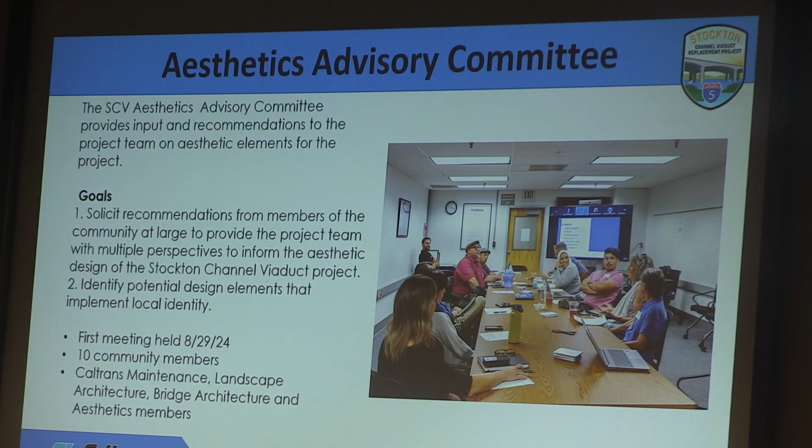I did want to mention, and I really did want to thank, the local city of Stockton community members who came together and assisted Caltrans as part of an aesthetic advisory committee. I recognize some people in that picture. Yes, point taken. I think there may be some people missing too from the picture, but they may very well be in this room. They really did help us solicit some of their recommendations. We developed some mock-ups and they certainly helped steer the project team into the right direction.

We held our first meeting last year. They did recommend some good options. The community at large actually participated in voting on the aesthetic treatments that are going to be taking place. We will be announcing shortly the results of this particular survey after we announce it to the aesthetic committee first and make sure that we get their approval moving forward.

Yeah, so these were some of the pictures from where the aesthetic committee was looking at some of the aesthetic treatments we were going to be considering, particularly some of the retaining walls that we have throughout the project.

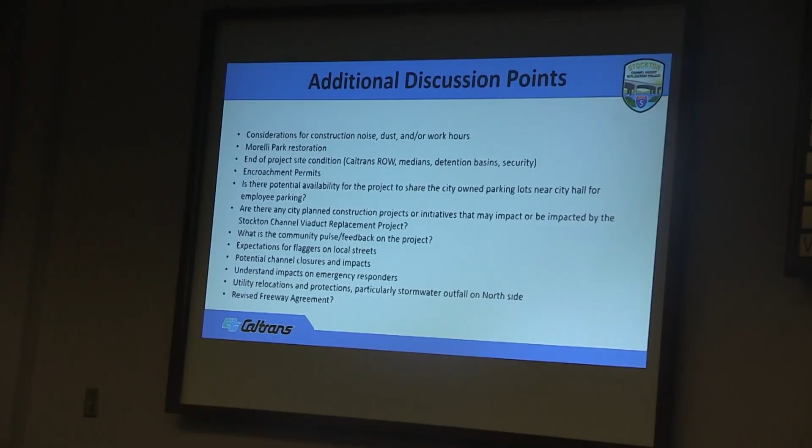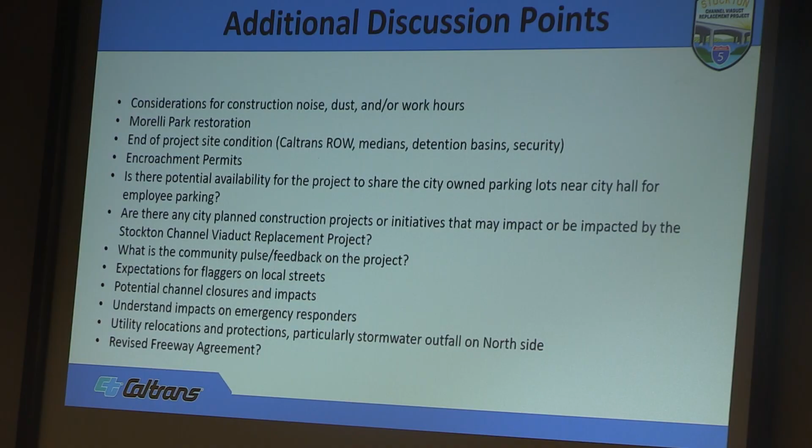And I think that leads us over here to a couple of discussion points that we wanted to see if there's any questions or input on. Certainly we brought up the construction issues that are definitely going to be a reality, including noise and dust. Certainly the Morelli Park restoration at the end of the project is going to be one that we'd like to actually partner with the community on as well. You saw some of the other considerations for if maybe we can ask for some of the parcels that look like they're city parcels near the project to assist the project as we move forward.

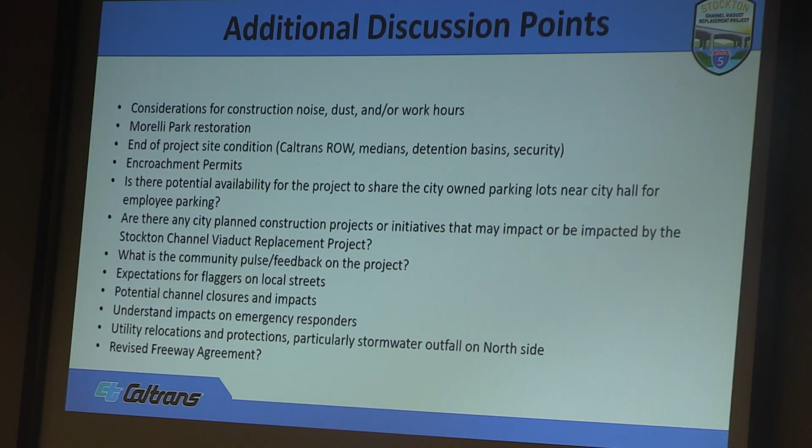Certainly some of the closures that we're potentially looking to get a little bit of feedback on. You will likely see some intermittent closures, flaggers, etc., starting as early as next year as the pilot test program moves forward. We do understand that there's definitely going to be impacts to emergency responders, and we've been in contact with them as well to give them an update on the project, and we're continuing to do so if and when things change as we move forward.

And certainly, potentially, we're going to be coming to the city to discuss the revised freeway agreement with the elimination of the current Pershing off-ramp and the reconstruction of the hook ramp. The freeway agreement will have to be updated to basically document that change. And that is it. I wanted to see if there was... absolutely, yes, go ahead.

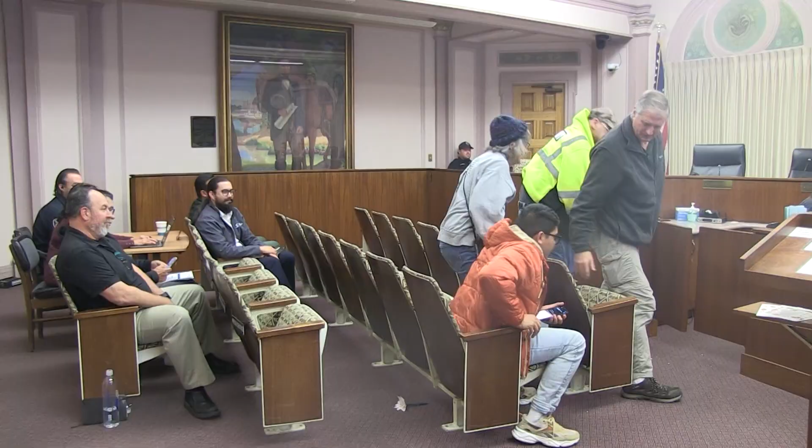I appreciate you taking your time out and giving your input. You're the people that live there. It's the citizens that we do all this for. So your input is vital and very much appreciated.

Thank you. And then I just want to wrap up my comments by welcoming Councilmember Enriquez on board as a full member. Give him a round of applause. And I will say he was the alternate member, and it already felt like he was a member because he's filled in so many times. So thank you for that. And with that, we are adjourned.